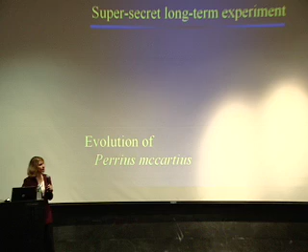I was going to finish this introduction up by showing you a super secret long-term experiment that was conducted by the federal government in the late 80s because they were wondering why this Perry McCarty fellow was being so successful. Unfortunately, it was actually termed the evolution of Perrius McCartius. Unfortunately, I have pictures from each of those years that look phenomenal on my Macintosh computer.

Just beautiful, impressive. As a matter of fact, this one right here, the 1989 picture of Perry McCarty has him with a full bicycle mustache that was painted on with black lipstick. He looks phenomenal. One of them, he has pink glasses on and a blue Hawaiian shirt. And then the last two are showing him winning his most recent prizes. I'm sorry they're not showing up here, I apologize for the computer glitch. But I give you Perry McCarty.

Thank you, Lisa. I'm glad your computer doesn't work very well. Pleased to have an opportunity to be here at Berkeley again for a seminar. Lisa indicated that she wanted to be a PhD student with me, and I said on one condition, she's got to say good things about me if she ever gets to introduce me. So she's passed her test. Thank you, Lisa.

Oh, sorry. So I get to talk with... that working? Okay, sounds good. Okay, and then I push that. Which one is yours? Which one is mine? Good question. Where to go to? It's not this one. Okay, somehow I gotta get this thing out of here. So if I can get you up here. There we go. Okay, now I gotta see if I can work a Mac. I mean a PC, I have a Mac as well. There it is, that right there? There we go. Oh, this thing's going to forward. Thank you.

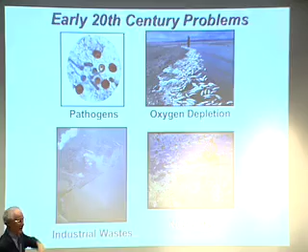And the pathogens, we were doing a lot about them in water, oxygen depletion, industrial waste, and nutrients, which we still have problems with, but they were major problems at that time, and we were just beginning to address them when I started. But there was one problem that was new, and I did some of my first research on it.

My professor, Clair Sawyer, was working on this, trying to convince the field and the manufacturers that this problem we were finding was due to synthetic detergents, new synthetic detergents. So our treatment plants all started looking like this. This happens to be San Jose, the new San Jose treatment plant.

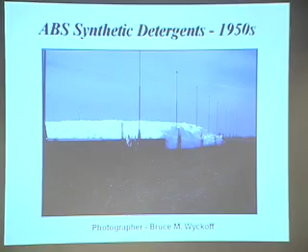It was shortly after that my professors at MIT, Clair Sawyer and his students, discovered that the problem with the new detergent molecule was that it was fairly branched. They said if you straighten it out, the problem will go away. Manufacturers resisted that, but by 1964 they did change, and that problem did go away. Nice, simple solution. Well, at that same time, we had another major problem, which I want to talk about.

Chanute, Kansas, we had a drought. Water stopped flowing in the river they used for the water supply, so they put a dam. The wastewater then backed up to the drinking water supply, and this is the water treatment plant, where they had all that suds foam going on. So they tried to treat it the normal way we did it at that time. And the nice outcome on the right there was the drinking water had a nice head of foam, but it didn't taste so good. So we had to do something about it.

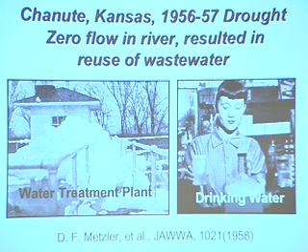So this was really a start of our thinking about reusing wastewater, in the growing need that we were going to have in the future.

Fortunately, others were thinking of this. This is at the Los Angeles County Sanitation District's Whittier Narrows, the first plant that was planned to reclaim wastewater. They put it into spreading basins and let it percolate down to the ground, so that whatever might have been left - because now we're concerned about trace organics and these persistent organic pollutants that we know now - they felt the soil would handle that as it percolated down to the groundwater. And that's still successful.

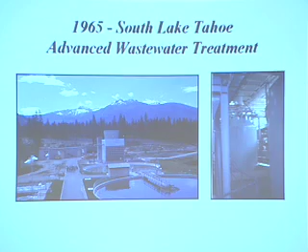We felt there was a need to go further than that. Back in 1965, CH2M Hill, a new company formed by a professor and his students at Oregon State, and Clair Hill, one of our graduates who had a small firm up north, got together and built the first really advanced treatment system addressing this new problem. They went through biological treatment, then chemical treatment in the tank you see there, air stripping for ammonia removal, multimedia filtration, and finally activated carbon canisters. That was complete treatment at the time, more of a demonstration that we could now do this full scale.

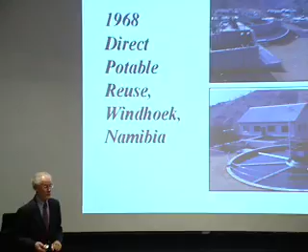Unfortunately, just a couple years later at Windhoek, Namibia, the same thing happened as in Chanute, Kansas, they essentially ran out of water. The only source in this desert area was wastewater. Jerry Stander in South Africa brought in the technology, you can see the treatment plant and in the back those tanks are activated carbon canisters that removed the final organics. It then went directly to this water treatment plant, a fairly small one, through the normal process and to the community. That's pretty direct potable reuse, which we're still somewhat fearful of in this country, but it was an important advance then, and still is, to meet the growing need for water and shortages in many parts of the world.

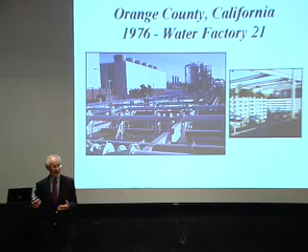It wasn't much later, because of this growing problem and the need in Southern California, certainly California has real problems, that Water Factory 21 started in 1976 with the Orange County Water District. They went one step further, to reverse osmosis, essentially removing all the salts from water. They called it Water Factory 21, and they were right. We know today this is the technology being applied throughout the country. Membranes have really caught on. This was the first really good demonstration at large scale, about 5 million gallons a day, of reverse osmosis membranes. It's improved greatly since then, bringing the cost down, and is now the state of the art.

One big problem with this is that while it helps with water, it takes a lot of energy to pull it through. And now that's creating a problem. We think we can get water, but it costs us energy, and certainly if you went to seawater, that would be true as well. There's a big energy cost to it.

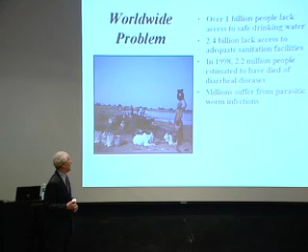That brings me to another point. When we have high energy costs, we have a deficiency of water. Although we're doing great things with our technology, we still have to face the fact that over 1 billion people in the world don't have access to safe water. Like this woman having to carry water a long distance, water that's unsafe, taken from an open well where people are bathing and so forth. That's a major problem, yet half the world's people do not have adequate sanitation. So while we've come a long way in some sense, we still have a big problem, one that's going to be made worse in coming years.

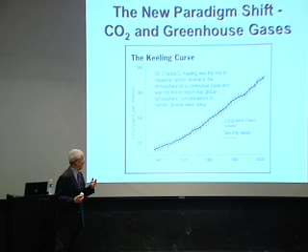This goes back to when I started thinking about this, 50 years ago. Dr. Charles Keeling at UC San Diego was brought on by Roger Revelle, who believed in what Keeling was talking about when he was just a youngster. They were looking at carbon emissions from fossil fuels and saying they really could have an impact on climate. The greenhouse gas effect was talked about. Keeling got sensitive measurements of carbon dioxide, went to Mauna Loa mountain in Hawaii, and started taking these measurements.

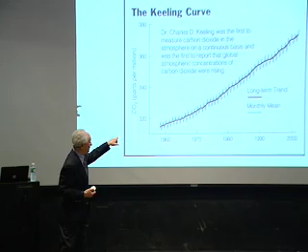These are really nice measurements because you see that yearly variation, in the summertime it sucks up CO2, in the wintertime it goes back, so you get this yearly variation, but it's going up overall. I first saw this curve in 1968, and they were saying it looks like it's going up, so people began talking about it and wondering what the future holds. It's only now that we can see that trend continued, in fact it's accelerating, and now we're really concerned.

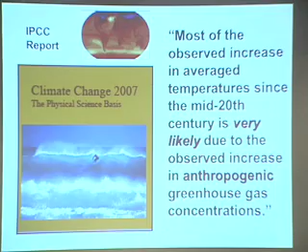Part of that, just this year, the Intergovernmental Panel on Climate Change, which started several years ago trying to address this problem and see what the science behind it was, faced a lot of skeptics. This year they came out with a report in 2007 saying that the observed increases in temperature throughout the world are very likely, meaning a 90% probability, due to anthropogenic greenhouse gas emissions. This group, just a few weeks ago, with Al Gore, won the Nobel Peace Prize for bringing this scientific evidence to the attention of the public and publicizing its importance.

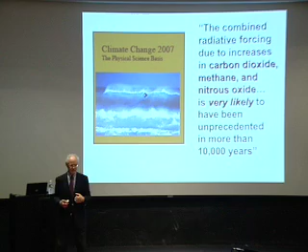Another part of this report I'd like to point out is that it's not only carbon dioxide, which we generally hear about all the time, but also methane and nitrous oxide that are very likely to have caused changes unprecedented in 10,000 years - essentially the whole time of human civilization since we started gathering together.

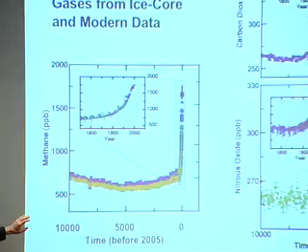They produced graphs showing, in the upper right-hand corner, carbon dioxide over 10,000 years. In the last 150 years, it shoots straight up. The insert shows that last 150 years since 1800. In the last 50 years especially, it's accelerating because we continue to use fossil fuels faster and in greater amounts. We get the same picture with methane and nitrous oxide. This has a lot of implications on what we as environmental engineers do, and I want to talk about that.

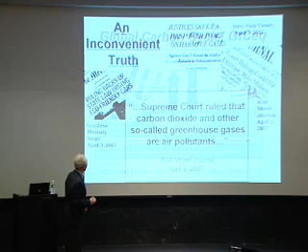Very interesting, and I found this really surprising - the Supreme Court, reported in the Wall Street Journal on April 3rd, not an April Fool's joke, it's true - said essentially that carbon dioxide and other greenhouse gases are air pollutants. That's a real change for our field. All this time, everything we did, if we could take organic materials and convert them to CO2, that was our objective. Now, all of a sudden, we find that's a pollutant too. I think it's going to cause a paradigm shift in our way of thinking about what we do in the water field.

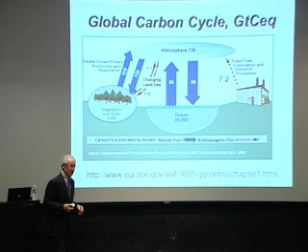If we look at the overall balance here - the gigatons of carbon equivalents in annual flux - we see most of what's going on is natural. What we do, the anthropogenic contribution, is that little 7.2 on the right side. That's what we were contributing around the year 2000, and that's the number that is going up, which we want to try to bring down. It looks small compared to the other fluxes - the atmosphere has about 730 gigatons of carbon, so this represents about 1%.

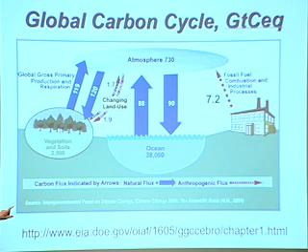But a lot of that partitions down into the ocean and is taken up by land. It's not the net increase, but we keep putting it up there, upsetting the balance so it has to respond. So what we're trying to do is get that 7.2 down as low as we can, or at least slow it down so we have time to adapt. It's pretty obvious there's no way we're going to get rid of that 7.2 unless things really change, but if we can slow it down, we'll have a chance to adapt to the major changes taking place.

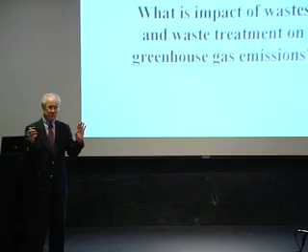These changes involve the distribution of water throughout the world, as well as problems like sea level rising and intruding into our coastal areas, contaminating our groundwater with seawater. We've got a whole host of water problems associated with this that we have to address. The thing I want to talk about is what problems are going to be created for us in our field. The question I want to ask is: what is the impact of our waste and waste treatment on greenhouse gas emissions? In other words, what are we contributing to the problem?

We may be affected by climate change, but we're also contributors to it. If we look at the global warming potential, where CO2 is 1, methane is 21 times worse than carbon dioxide, and nitrous oxide is 310 times worse. So while the evolution of methane and nitrous oxide may be relatively small, because of their much greater impact, they are of more concern, and something we've got to concern ourselves with.

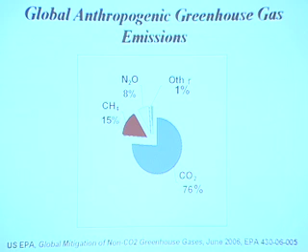The EPA looked at global emissions of greenhouse gases, and they estimated that methane and nitrous oxide represent about 1/4 of total emissions from these two gases.

Now, about methane - I like methane. I started my research on anaerobic treatment, production of methane. I always thought it was a wonderful process. Here we take a waste - I want to show you this, because a lot of that methane comes from this process that I like so much.

Let's follow through what it involves. We take complex organics - proteins, carbohydrates, and fats - and mixtures of microorganisms feed on that, convert it, hydrolyze it, ferment it, and end up cutting it down until they convert it to acetic acid and hydrogen gas. About 1/3 of it goes to hydrogen gas, and about 2/3 goes to acetic acid.

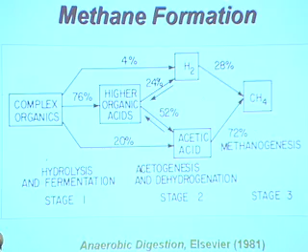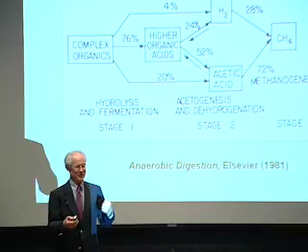Then the methanogens take that hydrogen and convert it into methane gas. So we have this ecological system of organisms growing symbiotically, working together, living on our waste and growing on our waste, and producing something of benefit for us - a biofuel, a gas that's not fossil fuel. So we're in symbiosis with them too, because they work for themselves, but they also work for us. It's a great process.

However, if we let that methane escape, it creates a problem - global warming. So what we've got to do is capture this process and use it for our benefit rather than harming ourselves. That's part of the problem we've got to solve.

Now we do this with digesters of different kinds. The 3 on the left are treating sewage sludge - one at Lake Tahoe and one in San Jose. This is one of the eggshell ones - we've got a lot of them in the US now, and they're in Germany too. The 4 on the right are treating industrial waste.

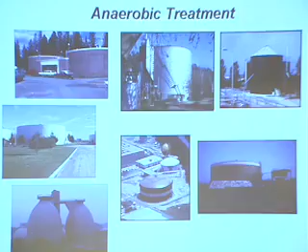That's winery waste in South Africa. The upper right is pulp waste in the Netherlands. Lower down is molasses waste from rum manufacturing in Puerto Rico. And the far right is sugar beet waste in Sweden.

They're all different processes - one is called the Clarigester, and there's an upflow sludge blanket reactor, an anaerobic filter, and this is like an activated sludge system. There are many different ways of doing this. From the outside, you can't tell much about the difference, but they're quite different processes, and they're working quite well, applying it in their particular ways.

Also in China, in little backyards, they've got a couple pigs. There are many in these little villages - they have a little trough that goes down below into a little 1 cubic meter tank like this, and the methane gas goes through a little pipe into the kitchen, used for heating the stove and for lighting. So we can do it on a big scale or a small scale, all converting waste to methane and using it for our benefit instead of losing it.

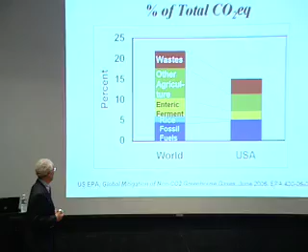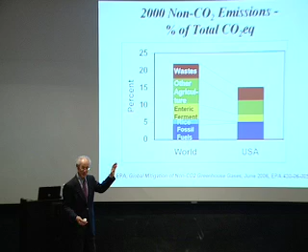Now, if we look at the non-CO2 emissions, we can see where methane and nitrous oxide come from, in the world and from the US. This doesn't imply the US isn't doing more than its share - the US uses so much fossil fuel for carbon dioxide that our total percentage of methane and nitrous oxide is smaller than the rest of the world, which doesn't use fossil fuels as much. But in either case, this is a pretty big percentage.

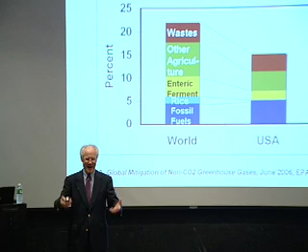To show where methane and nitrous oxide come from, starting at the bottom in blue with fossil fuels - that's from coal, fugitive emissions from coal mining, natural gas usage, and so forth. So some does come from fossil fuel sources, but the rest comes from that biological process I indicated before - from rice fields that are anaerobic at the bottom, and enteric fermentation, which is belching from cows. That's because they have a rumen, a little digester in themselves, and some of the methane they produce escapes. So it's a factor.

Other agriculture, a lot of that's from fertilizers and the nitrous oxide that escapes. And the top is waste. Wastes are the things that we sort of are, in our field, taught to deal with. So what we deal with, representing 3 or 4%, is waste.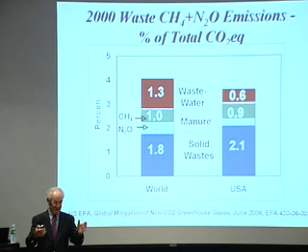Now let's look at the waste a little bit to see what's happening here. Almost half of that, or so, is solid waste. It's the stuff we throw in the dumps, and it ferments and produces methane, and it just escapes.

Manure comes from animals, not the belching. This is not the belching part, but this is the other part that falls around and goes anaerobic, and so produces methane. And the upper part is from wastewater throughout the world.

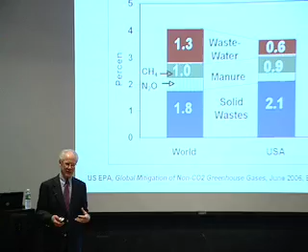Now that's not from the treatment plants, not from the ones I've been showing you. What that comes from is things like septic tanks and cesspools, where we don't collect the methane, where we put it in an anaerobic environment, coming up from sewers. So there's a lot of our waste that we don't really treat in a way where at the moment we're collecting it. I think we have to do something about that.

So that's kind of the bad methane that we have. These are our responsibility. We treat manure, right? We can do that. We know how to do it. Anaerobic digesters, we can use that.

We should. Well, indeed, last week, Tuesday last week, there was a full-page ad in San Jose Mercury. Right in the middle of this big full page, they had a little tiny picture. So I'll blow that little picture up so you can see it. It's talking about that little brown thing behind the cow, not the cow itself. It says, that's not manure. That's gold.

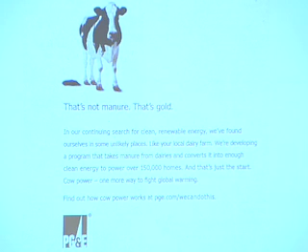This is by PG&E. They're saying, find out how cow power works. Cow power, one more way to fight global warming. And so they're pushing it. They're pushing it. We're seeing this all over. Come on, we can get the cow manure and make energy out of it. And we can do it at treatment plants too. So more of this is going on, and we know how to do it. We should be involved in that.

The other interesting part of the energy picture is that California was looking at water-related energy use. It's kind of interesting when they put out the report that says, of all the electricity we use in California, 18% of it is water-related energy consumption, and natural gas over 30%. Wow. But then you look at it a little carefully and say, well, most of it's heating and cooling.

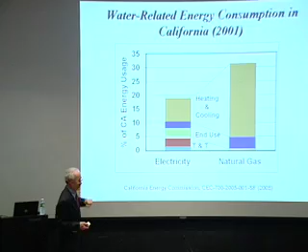In other words, we've got water used in heating and cooling of our buildings, and I'm not sure, if we didn't use water, we'd use something else probably. So maybe we can't be blamed for that, but it's part of it. Then there are other end uses, but there is a part that falls into our realm, and that's the bottom one, where it says transport and treatment.

And we see most of that, not much natural gas, most of it's electricity, and most of it's for pumps and so forth—transport and treatment. But it's still 5% of electric use in California.

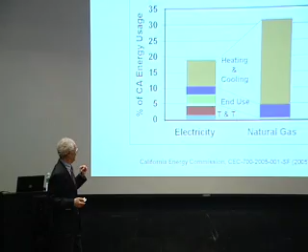And if we look at this a little bit, we see a difference between north and south. One of the things we see is that in the north, we only use about a third as much electric energy for our water as they do in Southern California. And it's obvious—it's because in the south they don't have water and we have to transport it so far, over mountains and so forth. It takes a lot of energy to get it there.

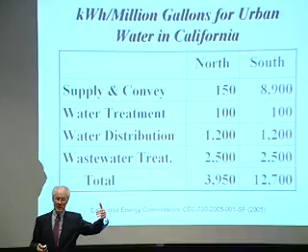And that's another problem we've created, because as we're growing, people are moving away from the water, and we've got to transport it. It takes a lot of energy to get it there. And that's affecting global warming, and it's going to affect distribution even worse than it is now.

If we come down, water treatment doesn't take too much. Water distribution, because we've got to pump it to the houses, is about the same in Southern California as here. That's a big one. But interestingly, wastewater treatment takes a lot of energy by comparison.

But wastewater, that is our major water, when we talk about treatment and transport, is for wastewater treatment. So let's look at that a little bit.

Now, I've been talking about this, and some of you might say, he's talking about 1 or 2%, and we've got the big problem. Why should we worry about it? It's not our fault, we did our part. Well, I'd like to mention Rene Dubos, a biologist and environmentalist from back in the 70s, who was very optimistic. What he preached, and we know this, is think globally, and we know there's a big problem globally, but act locally.

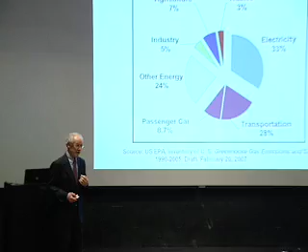In other words, we've got to all do our part on this problem. What I want to show is what I mean by our part, because if we look at the overall problem, we may have that little piece at the top, waste, 3%, and maybe we use a little bit of that electricity. But it's all broken up into little segments, and if each segment doesn't do its part, we won't get anywhere.

We hear so much about passenger cars, transportation and so forth. We want to increase the mileage, the CAFE standard for automobiles, from 27 to 35 or something like that, and that's going to solve it. Well, if we did that, that might save a couple percent of the problem. We talk about it in the news all the time, and Congress fights over it, the president fights over it, but it's only a couple percent.

No different than our waste. So if that's going to be so big, why don't we do that? What it means is we've all got to do our part, because there are all these different segments, and if we don't have each one addressing what it can do in this area, we won't accomplish anything. And that's the point I want to make. Ours is the waste, so what can we do about it?

So how can we reduce energy consumption and greenhouse emissions from wastewater treatment? I think this is something new, a new paradigm for us. We haven't thought about CO2 in the past, we think about other things. But I think in the future, not when I'm here, but when all you young people are going to work in the future, this is going to be an important part of your decisions on water and wastewater treatment. So let's look at it.

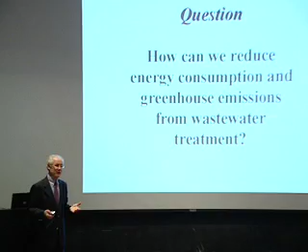I don't know what's the best thing. There's no way I can stand here and talk to you about all the possibilities, but it's worth at least showing some possibilities and what might be involved. Have you heard of Stanford University, down there in the bay, next to what we call South San Francisco Bay? So I'm going to focus in down there to show you some possibilities at that south end bay.

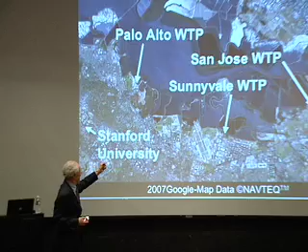Down in South Bay there are 3 treatment plants: Palo Alto, Sunnyvale, and San Jose. Those 3 plants have pretty stringent requirements down there. They have to do normal BOD removal, nitrification, filtration, and disinfection, so they do really advanced treatment before they can discharge. All 3 have the same discharge requirements, and all 3 are doing a good job. All 3 were designed at different times, with different requirements and different thinking, but they all do a good job, and there's no way I'm going to criticize any of them on that.

But what if today we want to think about global climate change, and how are they doing on CO2 emissions and electricity? Let's look at that now. This is not actual data from their plants, I made up this data. I took the plants and said, given that kind of plant and our normal way of operating, sort of back-of-the-envelope calculations just to get a ballpark, this is what I came up with.

Okay, now first we've got to look at doing aerobic biological treatment like we do here with an activated sludge tank and organisms in there. We blow air in.

That air takes power. We go to a power plant and get the power, say from some fossil fuels. And when we get that energy, we put off CO2. So not only do we get CO2 from oxidation of the waste in the tank, we also contribute some CO2 from the power plant that's given us the power to run the plant.

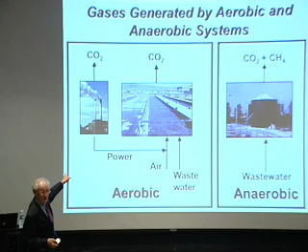If we look at anaerobic wastewater treatment, we don't have to put power into it. We just put in the waste, mix it up a little bit with the right bacteria, and they give us CO2 and methane. The methane goes up in the air, that's really bad. But if we capture it and burn it, it'll go to CO2, but at least we get some energy back that can offset the power we saw on the left side.

Now let's look at the Palo Alto wastewater treatment plant. They do primary settling, aerobic BOD removal like those tanks I showed, and nitrification, where they oxidize ammonia - that takes power and oxygen. But then they take the solids from primary settling and also the waste biomass from the activated sludge, and they incinerate it.

Look at this. Here's a picture trying to show, say if we start out with 100 of organic carbon and CO2, I'm trying to make a carbon balance through here. This is their influent. Up at the top we have liquid and solid - water and the suspended solids in it. I'll separate those two out.

In the liquid above, we have refractory organics - sort of humic materials, stuff that we don't even treat. They don't have an oxygen demand, but there's a lot of it that goes through the treatment plant in the stream and we never pay attention to it. It's kind of yellow, natural stuff, so we think it's okay.

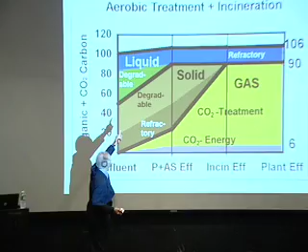Then there's green, which shows the degradable part, and that's what we treat in our biological system. When we do that, we create some bacteria, so this solid part gets a little bit bigger, and we get rid of that green stuff up there. To do that in our aerobic tank, we use a little bit of power, and this is the CO2 that comes from the power plant - we're trying to figure that in too.

So that's this little pink down here. CO2 is what we oxidize - we take that green stuff and oxidize it, the CO2 comes out from that oxidation. This other is the CO2 from the power plant.

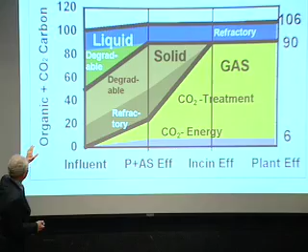Then we go to incineration, and we take all the solids and burn them, so we get all CO2 out from that. What we see on this scale is the CO2 that comes out is 90 - that's what this plant is doing. So we went in at 100, some refractory went out in the stream doing nothing, and we got that 90. Okay, let's now look at San Jose.

What San Jose does differently is instead of sludge incineration, they digest it. They put it in these methane fermentation tanks and get the energy back. Let's see what that looks like. It's the same going in, the same up to this point.

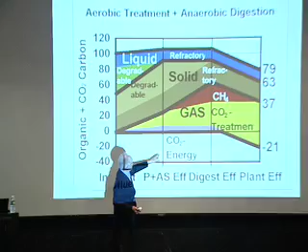But then we put it in a digester, and we take the degradable portion of the solids, that little light brown, and get rid of it to make methane gas, and we get some CO2 out too - both CO2 comes out. Then we take that methane and burn it for energy to supply this pink. We don't use fossil fuels to get this, we use that energy from there.

And indeed we offset some fossil fuel - someone else doesn't have to use fossil fuels, we send them the power. So we cut CO2 down, taking credit for not using fossil fuels. So the net from this, we see a 37 net increase of CO2 from here.

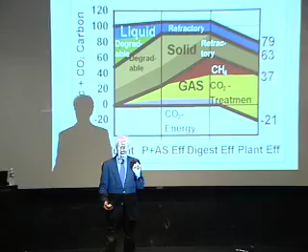And we see a little bit of solid brown between 37 and 63. You have to think about that - that material is refractory organics, like what we put in the stream, the blue. This we put on the soil as a soil conditioner, and it kind of decomposes. Now is that bad, or how do we think about that? Well, you can think about it - anyway, I'm going to say 37, but you can consider that little part.

So that's better, right? Now, one plant that's interesting to me is the Sunnyvale one in the middle here. And I blew up Google.

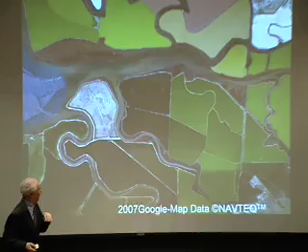I went down there closer, and I thought this is kind of neat. This is a Google map. I go down closer and look at the pretty picture, mosaic, abstract.

And that's photosynthesis in action. That's South Bay. There's all these ponds evaporating seawater, turning all these pretty colors, green. You see this from the airplane, green. This green, then it gets brownish, then red as it gets more concentrated, different kinds of algae and brine shrimp growing and turning it red. And when it evaporates, we get the white up top. So most of that is just solar evaporation of the pond, a lot of solar energy.

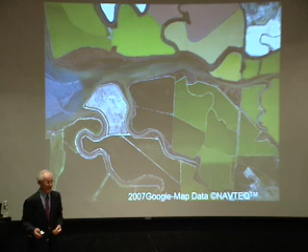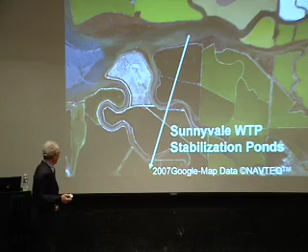Interesting down there, if we look way down in this corner, this little green, you can hardly see it's green, and this guy too, that's green as well. That little piece is the stabilization ponds, algae ponds used in Sunnyvale to treat their waste. That's treating waste from about 100,000 people. And the reason I like to show that little piece is I think we could treat the whole Bay Area if we wanted to, with all these salt ponds, turn them into algae ponds for waste treatment. Anyway, no one will ever do that. But I just want to show it.

So let's look at the Sunnyvale wastewater treatment plant. There's the stabilization pond, the great big thing. The heart of the treatment plant in Sunnyvale is there. You see it? We'll go look at it a little closer. There it is, and I'll show it.

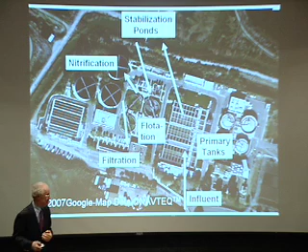The influent comes to primary tanks, gets the solids out, and what goes out, the soluble BOD, goes to stabilization ponds. After it's treated there by the algae, we come back and now we get grown algae. We've got to separate those out, so they have flotation tanks to separate the algae. The water then goes to these filters, nitrifying filters. After filtration, it comes to a filter plant to remove any suspended solids so we can disinfect it. Then it goes out as effluent, and we've got wonderful water that we've reclaimed that can be used for essentially any agricultural purpose.

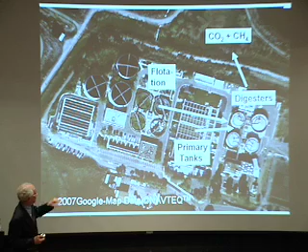We've reused the water by this. Actually, all the plants do this kind of quality. But what's different here is what happens to the solids. We get the solids from the primary tank that settled out, and also they take the floated algae, the algae they produce, and send them to the digester. What's digested produces CO2 and methane, and when we get through, there's residue left, good stuff that goes to drying beds, and the farmers take it and put it on the fields for agriculture. So at the plant, we have this waste coming in, they produce good reusable water, we produce energy, and they produce fertilizer. So we've used this as resource recovery.

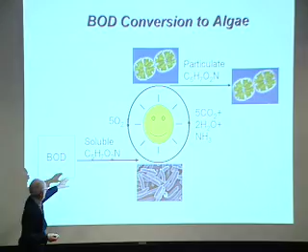Now let's look at what has happened in the algae plants. You have to think about that a little bit. So I made this picture. Now what we have after primary settling is soluble BOD, biochemical oxygen demand, that's organic matter. I'll just use this formula. It's got a little nitrogen in it and so forth. That's soluble, it doesn't settle out. Normally that's what goes to an activated sludge plant. Here it goes to the algae pond.

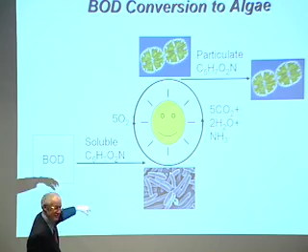In the algae pond we have sun shining on algae, so the algae take CO2, water, and ammonia and synthesize it into algae cells. It makes cells, and in that process they produce oxygen. That oxygen is used by the bacteria to oxidize this and make CO2. So it gets the thing spinning around. So what do we get? We go in with soluble BOD, and we come out with the same formula, same thing, only now it's particulate.

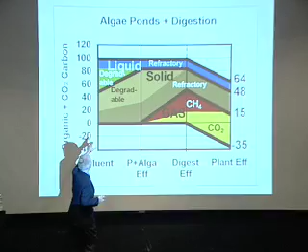So all the sun's done is turn the soluble material into particulate material. That's good for us because we can settle the particulate material and feed it to the digester. The soluble form is hard, we don't make digesters for that, people have been trying to do that. But we know we can take it concentrated in particulate form and do it. So that's one thing. Now what happens if we look at the algae ponds then? We don't have any energy used in the degradable BOD going away, the green stuff, so we don't have that little pink bit down here. We grow a lot of algae.

More algae. We send those to the digester, so we get all this soluble BOD and make it particulate, so we feed a lot more to our digesters, get a lot more methane gas, and consequently when we burn it, we get a lot more credit for it. So we only got 15 going out from this treatment system.

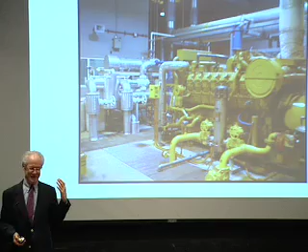Now these algae ponds, Bill Oswald here at Berkeley is responsible for all these algae ponds in California. He was the champion, he studied it, he's the one who really pioneered this, and we find him in a lot of places. Poor Bill passed away last year. We owe a lot to him for the work he did, because he always had this in mind, but he was a little bit before his time. But the technology he developed is there.

During the 1970 energy crisis, we worked together many times trying to do something here. I was working on the anaerobic digestion, he was working on the algae. I was putting them together, right?

Working great. These are the gas engines at Sunnyvale they use to power with the gas from the digesters, driving the electric generators, which they then can sell the energy. The gas engines also have to be right next to two big solid waste dumps, so they pump in the methane gas from the solid waste. They get the methane from the digester, put it in, burn it, and put it back onto the grid. So they're using their waste and making energy from it.

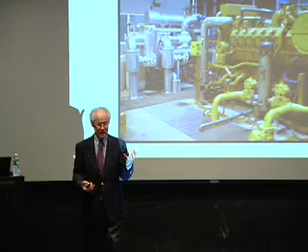And back here we see heat exchangers, and they use the heat from that cogeneration to heat the digesters. Right now they have an excess of heat. If you had some idea of what they could do with that excess heat, they've got some down there. But most of it, they put into electrical energy.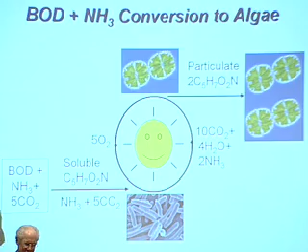Okay, I want to point out another part of this. I mentioned they have an obligation here to do nitrification of the ammonia, because if you put it in the bay and it gets oxidized there, it'll consume oxygen. So nitrification, or at least ammonia removal, is required.

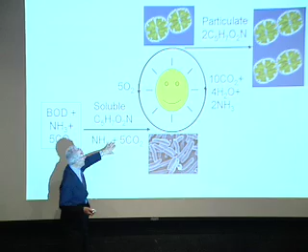But let's look at these algae ponds in another way for the nitrogen. Before I just showed the soluble BOD, but actually out of the primary tank we also have extra ammonia, which comes from our urea—it hydrolyzes and forms ammonia—and maybe CO2 if we can get that from someplace, which we have a lot of places for. But if we put in not only this, but this into the pond, we have a lot more food for the algae to grow.

Instead of 1 unit of algae, we'll get 2 based on this. So we get more algae by that nitrogen, and that goes into more cells, more biomass, more energy.

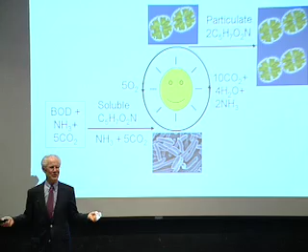The other thing that happens in Sunnyvale during the summer, when the sun is really shining and this whole process works, they don't have to nitrify anymore because they run out of ammonia—it's all taken up by the cells. That saves more power, saves more oxygen, saves more N2O. So we get another big impact by growing the algae from this part.

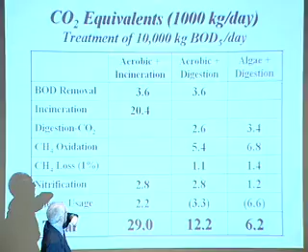Now, I don't want to bore you with all these numbers, but I was trying to do the back-of-the-envelope calculation, taking a typical wastewater characteristic and these treatment processes, and looking at the CO2 equivalent from 10,000 kilograms per day of BOD. That's about what you'd get from a population of maybe 200,000 people.

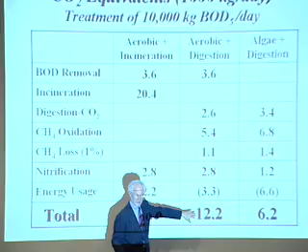Sunnyvale is about 100,000, so it's a city twice that big, and this would be 1,000 kilograms a day—about a metric ton of CO2 equivalent. We'd get from the Palo Alto plant, aerobic incineration, about 29 metric tons per day. With aerobic digestion, we cut that over in half to only 12, and with the algae, 6.2.

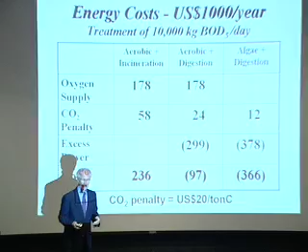So the point here is we make a big difference by the kind of design we have when we want to look at it in terms of CO2 production. And if we look at the energy cost for these different plants, working out about 10 cents per kilowatt hour—this is a bigger city than Palo Alto, about 200,000 people—it would cost about $236,000 a year that they'd have to buy in energy to run their plant.

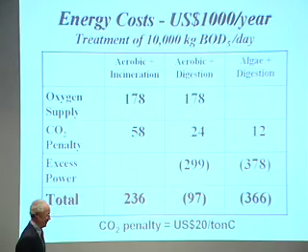At Sunnyvale, with San Jose, because of their digesters, they'd get about $97,000 back in credit at 10 cents a kilowatt hour if they can sell it. They use some of that energy for other things on their plant rather than just aeration. And if we do the algae digestion and get all that extra algae, we get about $366,000 back in energy. So not only are we saving CO2 and cutting that down, we're saving on energy, we're making money in the process.

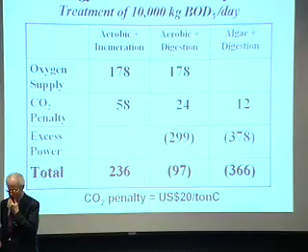I put a penalty on here, a CO2 penalty, and I want to think about this because we hear of this CO2 tax, carbon tax, Congress thinking of it. We have a global trading system for carbon right now. It's about $4 or $5 per ton now trading on the world market. It's not a big market, it's not that expensive.

If we're going to start really thinking about doing this in the US, Congress is talking about putting a charge on it when you put CO2 in, probably starting even lower than that. But if we get that started and go up, it's likely to go up to $20 a ton if we get serious. And the government panel said if we really get serious with this, it's got to go up to about $200 a ton if you're going to really force people to think differently about what we do.

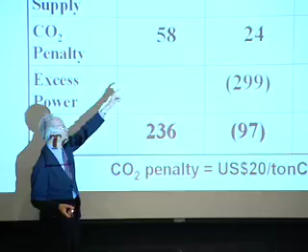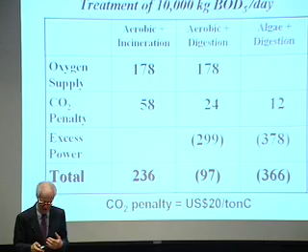If it goes up, I just put $20 a ton here to show you the impact it would have on the bottom line: $58 of the $236. So that could get you thinking about it, at least fit into yours. If it went up to $200, you can see that would be the major driver behind what you do. So I just wanted to show where that fits into our overall thinking.

In conclusion, we need to reevaluate waste treatment alternatives because of climate change concerns, something we need to do in the future. The other thing is methane, the bad methane we let emit now, we've got to contain that because it's an important component. We've got to think about septic tanks, sewers, and certainly landfills. We're putting a lot of attention into that now, but we've got to do more.

Desired alternatives are those that reduce both greenhouse gas emissions and power consumption. That's the direction things are going. I think anaerobic treatment, which I've always liked and thought was good for this, maybe we'll do more about it in the future. Certainly in California, most of our treatment plants do it. Some places in the country frown on doing it, I don't know why, but they have. We've got to think about that more for our industrial waste in general too.

One other point is wastewater is a resource, we can't think of it otherwise. In fact, in Singapore, which is doing a lot on this, they don't call it wastewater, they call it used water. They look at it as a resource for water, energy, and nutrients. And that's the way we have to look at all our resources and get as much out of them as we can.

I'd like to finish off with another Rene Dubos quote, he's always so good at putting it in just a few words. I heard him give a talk at Caltech back in the late 60s or early 70s. He said, trend is not destiny. He's an optimist, and what he's looking at is all these trends we project, like climate change. We see, oh my God, sea level is going to rise 3 or 4 feet, we're all going to be inundated, the Bay Area is going to be washed out and so forth. I don't know if that'll come, I won't be around to know whether that is destiny or not, but Dubos said it's not destiny. But what he meant by it was something else.

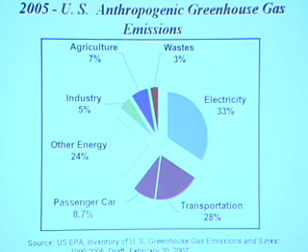The first one is, when you showed the nitrous oxide and the methane and the CO2 as being 8%, 15%, and 76%, is that in carbon dioxide equivalents? Are you talking about the slide dealing with the biological conversion, starting with organics and going to methane? It was before that. It was an introductory one showing how much emissions.

Oh, well, okay. What's your question about that? Let's see if I can find that. The numbers of the methane and nitrous oxide being about 25% of the emissions, I was wondering if that was in carbon dioxide equivalents. I just missed that.

Slide 19, right there. This thing jumps around. 19? That one. Okay, what was the question on? Is that in CO2 equivalent? Yes, that's in CO2 equivalents. Okay, yes, yes, yes, and thank you.

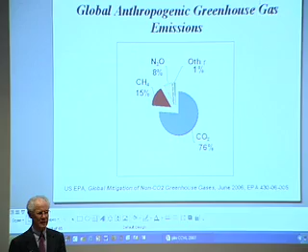So we see iron and manganese leaching, we see all the nitrogen disappear very quickly. In these extremely anaerobic conditions, are these land processors or land applicators of processed water releasing a greenhouse gas, a form of gaseous nitrogen? Well, as it goes down to the ground and goes anaerobic, you will get, as I showed before, methane. You will get methane.

And the methane will be there under anaerobic conditions. Now you're down in the ground. If the methane then escapes to the atmosphere, it's a greenhouse gas, a bad one. As it goes through the soil, if there's oxygen, if it passes through an aerobic zone where there's oxygen on its way out, and if there are methanotrophic bacteria that live on the methane and oxidize it, it'll be oxidized to CO2, and it won't go out. One of the questions we'd have in any case, even septic tanks, is that these estimates on septic tanks are based upon some assumptions, and some nitrous oxide.